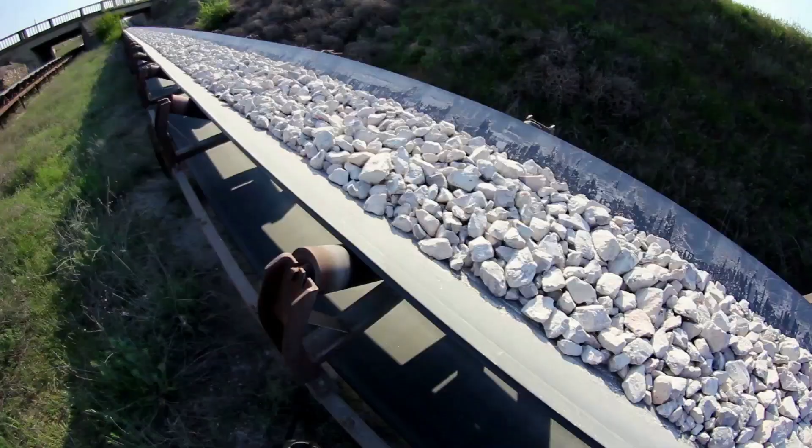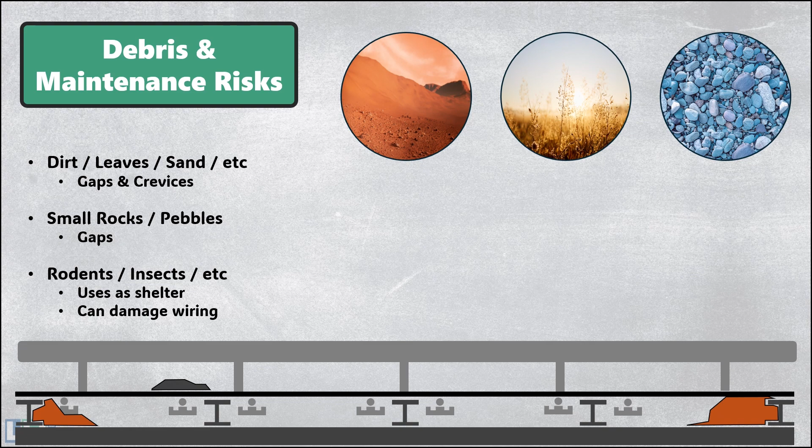Weighbridges are designed to withstand harsh environmental conditions and heavy loads. However, like any precision weighing equipment, they require regular maintenance to ensure reliable performance. Over time, wind can blow dirt, sand, leaves, and other debris into gaps and crevices around the weighbridge. Small rocks and pebbles may also become lodged between the deck and ramps. When exposed to rain, this material can compact and harden, gradually building up around the structure.

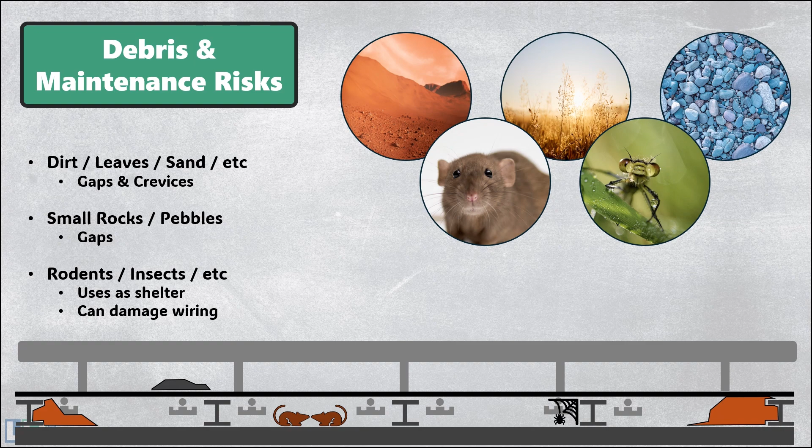In addition, weighbridges that are used seasonally or infrequently may provide shelter for rodents, insects, and other small animals. These pests can damage wiring and load cell cables, leading to costly repairs and operational disruptions.

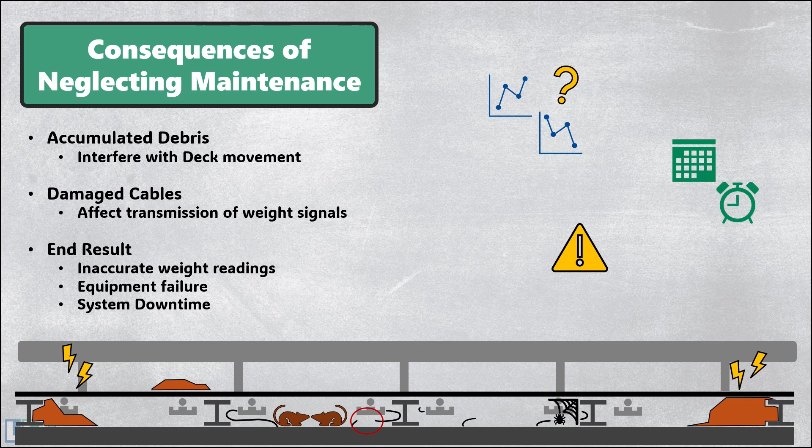The accumulation of debris can interfere with the free movement of the weighbridge deck, causing it to rest against surrounding material instead of being fully supported by the load cells. Similarly, damaged cables can affect the transmission of weight signals. Both situations can result in inaccurate weight readings, and in severe cases, may lead to equipment failure or system downtime.

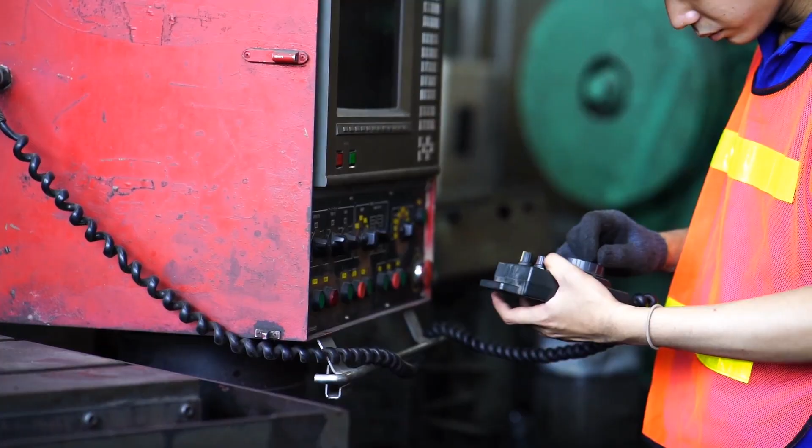So, to prevent debris buildup, equipment damage, and weighing inaccuracies, it's recommended to perform inspections on a daily, weekly, and monthly basis. The frequency might vary depending on the operating environment and how often the weighbridge is used.

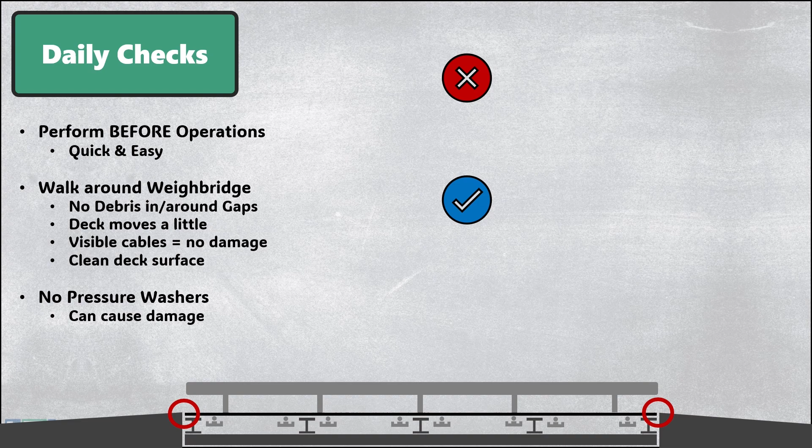Daily checks are pretty straightforward and should be carried out before any weighing operations begin. First, walk around the weighbridge or axle pads and check for a few things. Make sure there's no debris stuck in the gaps between the weighbridge deck and the surrounding ground. Verify that the weighbridge deck can move freely. A properly functioning deck should have just a bit of movement and shouldn't feel seized or restricted.

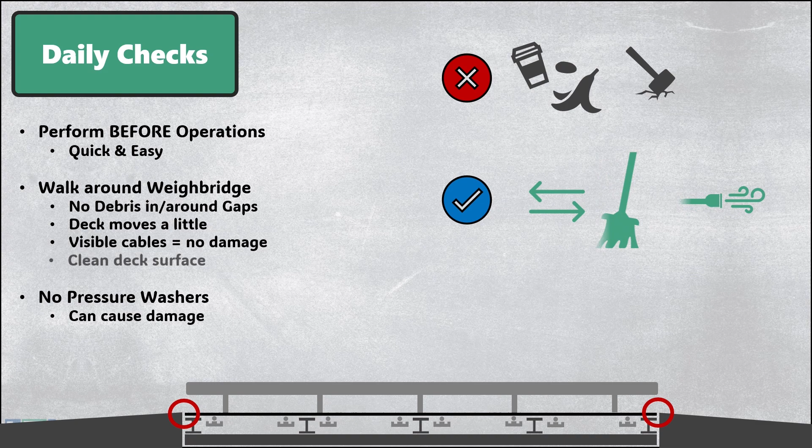Next, check all visible cables for any signs of damage, like cuts, wear, or evidence of rodent activity. Clean the deck surface with a broom or compressed air to get rid of dirt and loose debris. Pressure washers aren't recommended, since high-pressure water can actually damage load cells, connectors, and cabling.

Weekly checks include everything from the daily inspections, but with an extra step, an internal inspection. Go ahead and open the inspection covers and take a look inside the weighbridge for any dirt, sand, stones, leaves, or other debris. Keep an eye out for signs of water accumulation and check for any damage to cables, connectors, or load cells. Look for evidence of rodents, insects, or other animals nesting inside the structure.

Remove any debris using a broom or compressed air, making sure all components stay clean and unobstructed. Regular weekly inspections are really important to help keep the weighbridge in optimal condition and ready for calibration whenever it's needed.

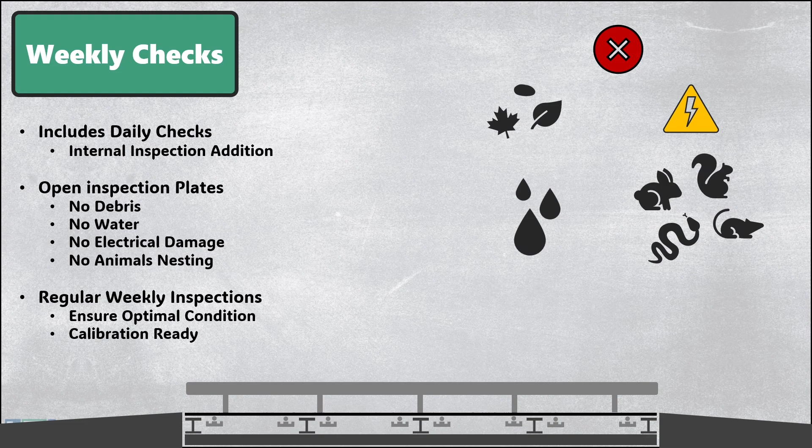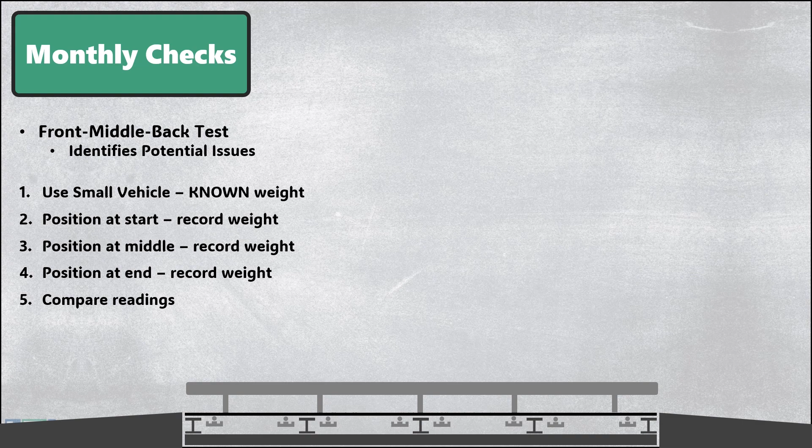Monthly performance check. As a best practice, weighbridge owners should perform a front-middle-back test at least once per month. This test is applicable to weighbridges and helps identify potential mechanical or load cell issues before they affect operations. How to perform the test?

First, use a forklift or other vehicle with a known and verified weight. Next, position the vehicle on the front section of the weighbridge and record the weight. Then, move the vehicle to the center of the weighbridge and record the weight again. After that, repeat the process on the rear section of the weighbridge. Now, compare all three weight readings.

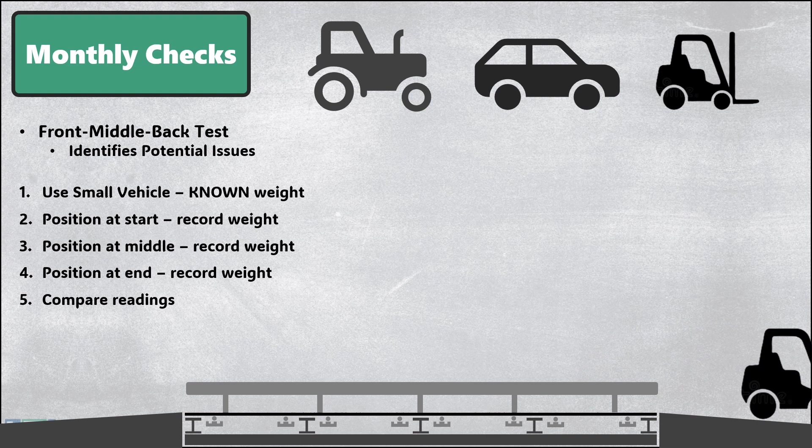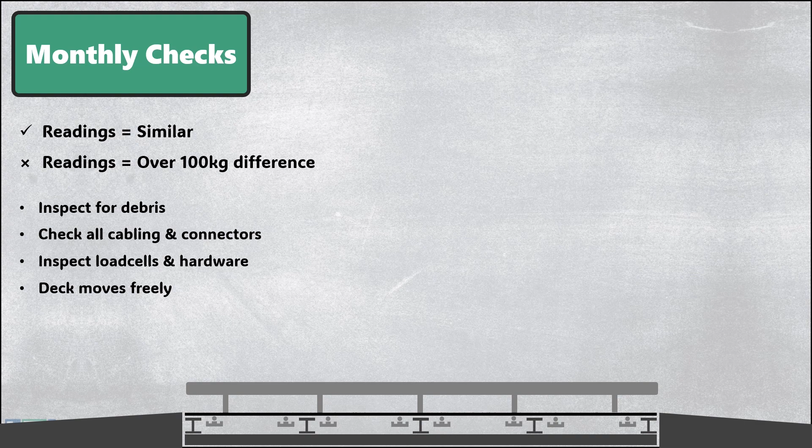The readings should remain reasonably consistent across all positions. As a general guideline, a variation of up to 100 kilograms is considered acceptable for most applications. If the variation exceeds this range, inspect the weighbridge for debris restricting deck movement. Check all cabling and connectors for damage.

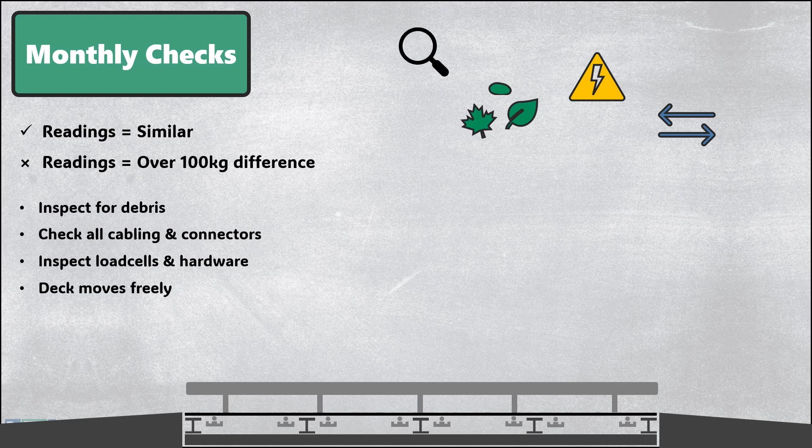Inspect the load cells and mounting hardware for signs of wear or damage. Also, verify that the weighbridge deck can move freely. If no obvious cause can be identified, contact LMI for technical assistance.

By incorporating these simple inspections into your maintenance routine, you can improve weighing accuracy, reduce downtime, and significantly extend the service life of your weighbridge.